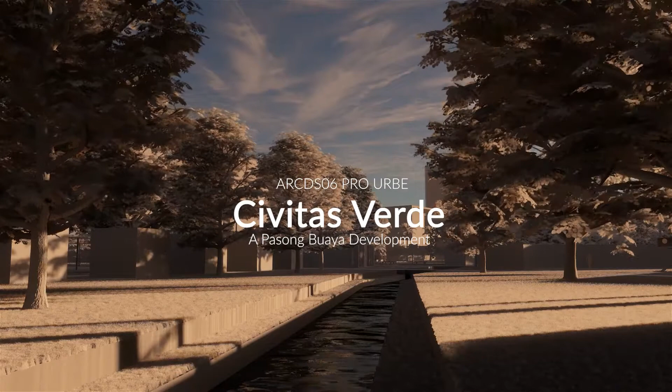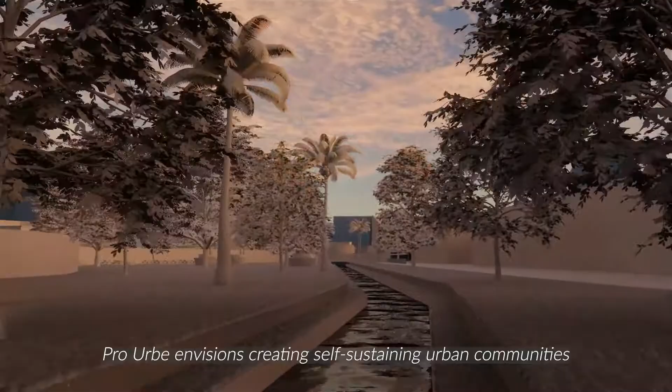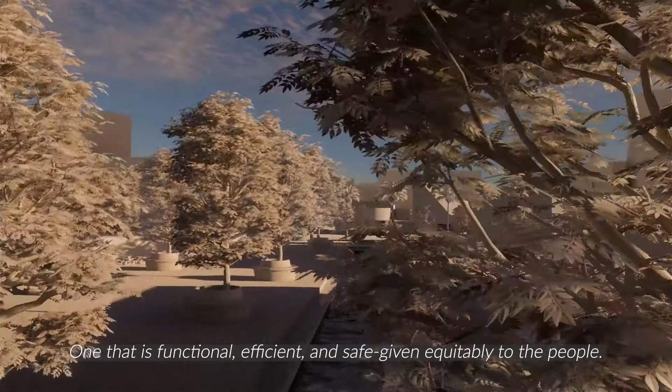Pro Urbe envisions creating self-sustaining urban communities apt for contemporary living in a bustling metropolis, one that is functional, efficient, and safe given equitably to the people. After all, you don't have a city if you don't have people in it, so it all begins with people. Whenever we work on projects, we always make sure that our projects will be suitable for our clients.

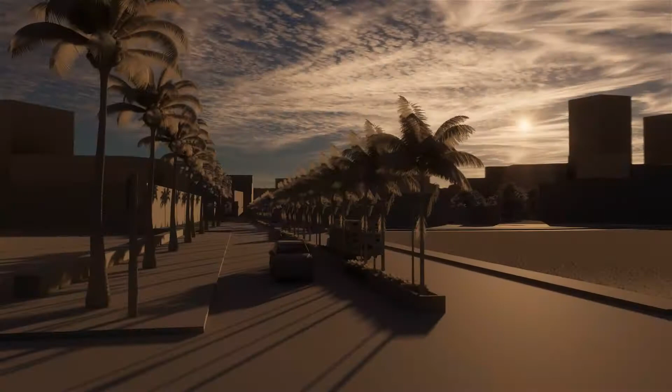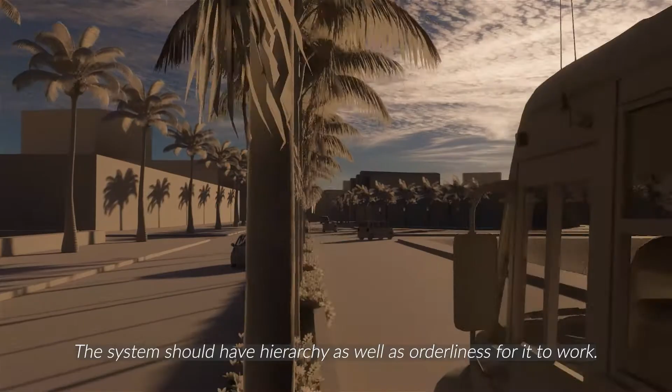A great city, in my opinion, is one with a good transit system, which can be utilized by the whole population, whatever class they may be. The system should have a hierarchy as well as orderliness for it to work. A city with greeneries, which can act like a breathing space, is also something that can lessen the pollution, which is more common in cities nowadays. All in all, sustainability and progression are the keys in making a city great.

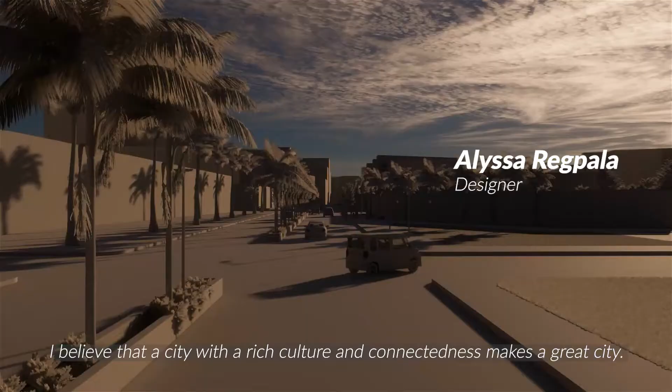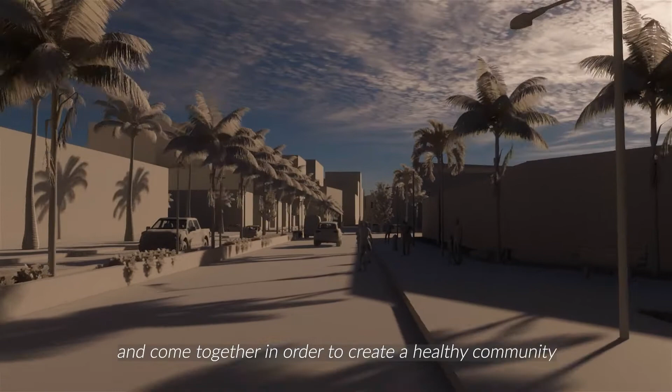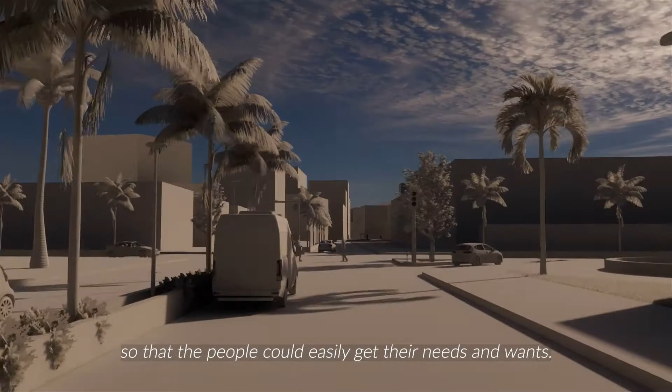I believe that a city with a rich culture and connectedness makes a great city. It is important that the ambience, the people, and the food are authentic in order to bring life to the city. It is also a big bonus if there are places inside the city where members can connect and come together in order to create a healthy community. Also, the availability of the different establishments should be a main priority so that the people could easily get their needs and wants. And lastly, in my opinion, architecture can also make a city great as it attracts more people, opens more discussions, and creates aesthetically pleasing surroundings.

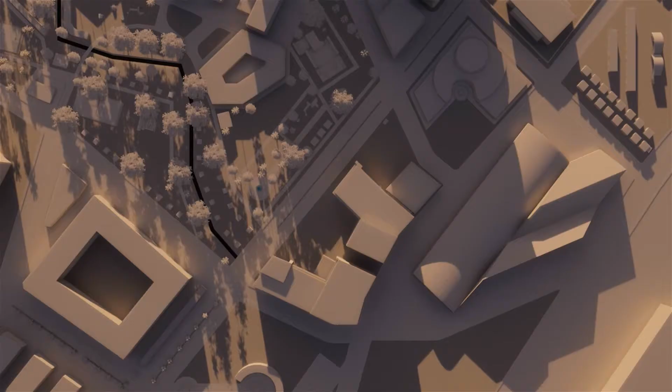When the project was introduced to us, our mentor mentioned a vision wherein we would create a development that is self-sustaining and self-adapting to everyday changes. We'll get to understand different behaviors of humans in different environments. We were tasked to choose a site that we think would best represent the different ideologies we've learned along the way. From the 9 different sites, we chose Pasong Buaya.

The site was unfamiliar to us given that it is located in Cavite. It was also the only site that was outside the Greater Metro Manila, and we thought that it would be a nice challenge for us architecture students to create a community despite it being a total green land. Well, eventually, I was really not familiar with the site. We were given ample time to choose, and quickly browsing through it, I saw that in the vicinity there are establishments and few recreational activities from Vermosa Development by Ayala Land, residential areas, and few neighboring agricultural land fields.

Given that the site has an open green space, from then, on top of my mind, we could either push through in utilizing the area for agricultural amenities if the said land could have a reasonable yields, or to make use of it as a city within a city kind of development.

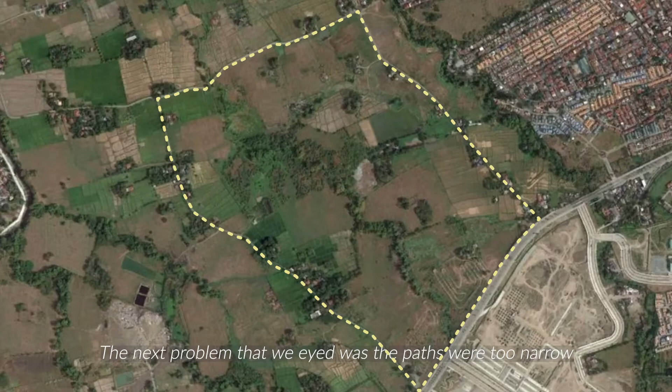The next problem that we eyed was the paths were too narrow and it would be difficult for two cars to pass together. The site was also not accessible as there was limited transportation. The main road near the site, which is the Daang Hari, is also frequented by private cars and is a shortcut from Cavite to Muntinlupa. So during our initial studies, we thought that developing the site may actually cause additional traffic.

We really looked at the site from a lot of angles to really assess the pros and cons and to design an urban plan that would be useful not only to the natives in the area but also to the newcomers.

The next con we observed was that there were fewer trees in the area, which means the sunlight and rain are not commonly covered. The site is also a few miles away from Taal volcano, so volcanic ashfall is a possibility in the area.

The next problem was that there may be a lot of displaced people, but when we conducted our site visit, we learned that most had been paid to evacuate the site by the developer.

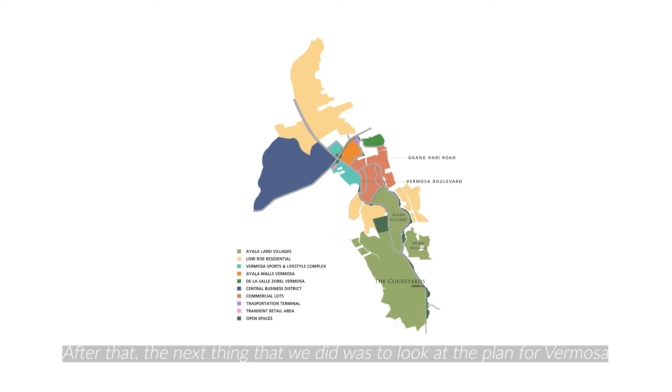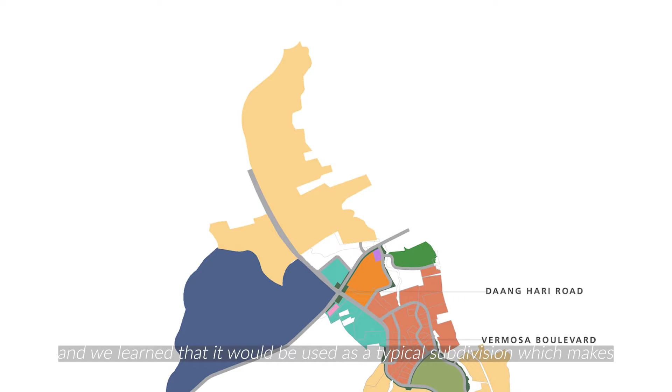After that, the next thing we did was look at the plan for Vermosa, and we learned that it would be developed as a typical subdivision, which makes the promising site a waste. So we designed an alternate plan that would make the site used for a better purpose.

In assessing the site, we discovered different issues such as the lack of cultural and historical importance, as well as the site's lack of accessibility and walkability features.

To further guide us, we created goals that would become the basis of our design. Our number one goal is to boost the present culture and integrate new ones in the community. The residents must become engaged through different initiatives and activities placed through the creation of socio-cultural development strategies.

Creating accessible, comfortable, and safe streets for pedestrians was also one of our key objectives. We would want to increase the number of people using the streets both for walking and for cycling. Public transportation is strategically placed to accommodate a high number of residents and workers.

We also want to reassure the safety and security of the residents by creating better measures for disaster preparedness and awareness, not only through designing roads that pertain to street safety, but also through the zoning of the site.

Which leads to another goal, which is the formation and promotion of passive sustainable design. What we envision is a development that would be useful for generations to generations.

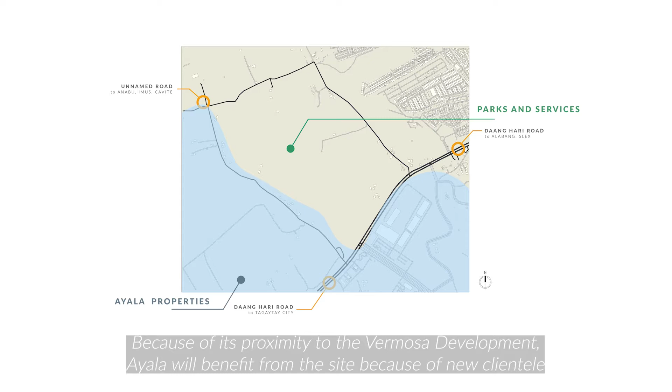In alignment with those goals, we predict a few opportunities for the people involved. Because of its proximity to the Vermosa development, Ayala will benefit from the site because of its new clientele and its traversability from the site to Ayala properties.

The city of Imus will also be able to benefit because, along with the many open spaces and parks in the area, industrial areas like hospitals and transportation terminals will be present in the site, which benefits not only the residents of the development, but nearby neighboring subdivisions as well.

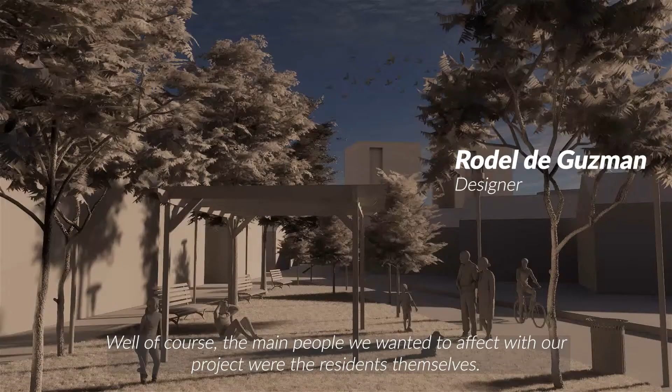But of course, the main people we wanted to affect with our project were the residents themselves. With our goals in mind, we wanted to give them walkable spaces where they could feel connected to people and proud to be a member of their communities, and spaces where they feel safe.

To make our site livable and sustainable, we created different strategies for the different areas we wanted to target. The first one is the socio-cultural development strategies.

We plan to have a space for cultural exchange, presentation, and exhibition. We also plan to create communal spaces within structures and outside, and create a community that resonates with the physical environment and present culture.

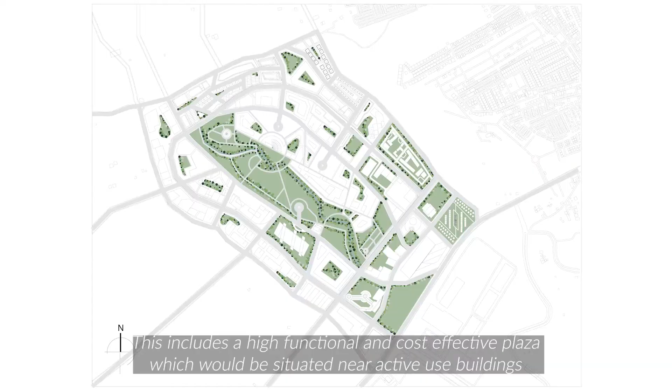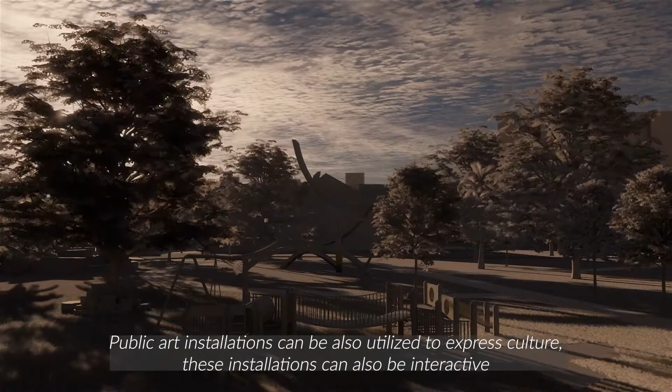This includes a high-functional and cost-effective plaza which would be situated near active-use buildings, as this would help members engage and come together. We also plan to make culture centers which can help the community learn, and public art installations can also be utilized to express culture.

These installations can also be either interactive, passive, formal, informal, planned, or spontaneous to cater to the diverse activities of the area. For the environment development strategies, we opt to have parks and open spaces to enrich the quality of life.

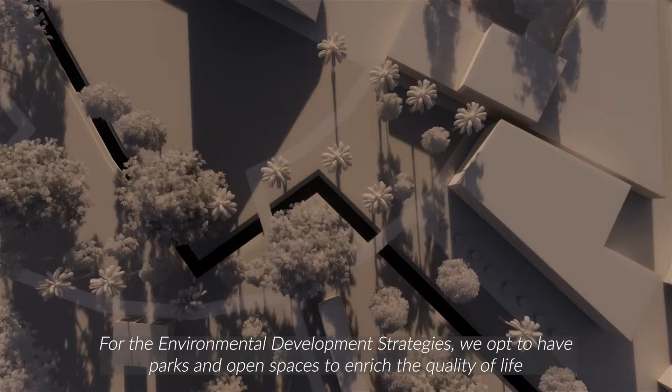For the design, we decided to make it passive and sustainable in order to mitigate the harmful effects of structures to the environment. And lastly, we would apply smart technology to the site.

The next one is the economic development strategies. In making this project livable and sustainable, this includes increasing the employment rate for residents and non-residents by producing more jobs and more opportunities.

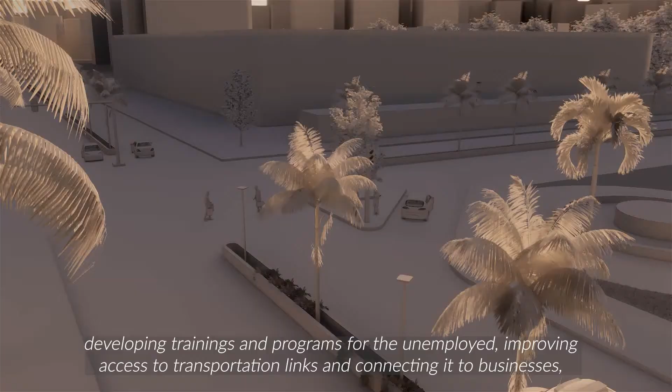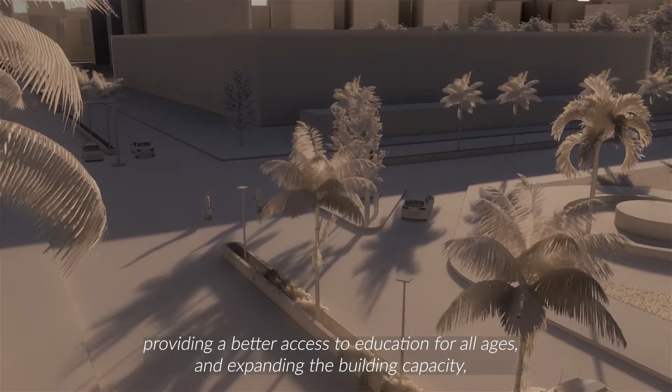Developing trainings and programs for the unemployed, improving access to transportation links and connecting it to businesses, providing better access to education for all ages, and expanding the building capacity.

These are the strategies we thought of. Clearly, building a city within a city.

On top of it all, in economic development strategies, we opt to have a successful city planning for a better return of investment, which can be attained by attracting outside investors, getting involved with the community, and having long-term measurable goals.

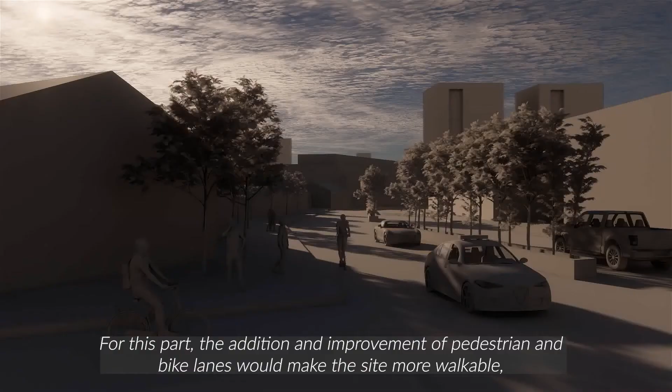Last but definitely not least is our spatial, zoning, and mobility strategies. For this part, the addition and improvement of pedestrian and bike lanes would make the site more walkable, sustainable, and livable, as it would aid convenience and recreation.

Furthermore, it would benefit the environment in lessening air pollution.

We opt to carefully design the public spaces, catering to users with inclusivity in urban street design amenities, creating more compact activities within the central nodes to have familiarity and community-activated spaces.

Likewise, the creation of mixed zone areas is also something that the site has. This type of zoning attracts people by having their necessities available within a walking distance parameter.

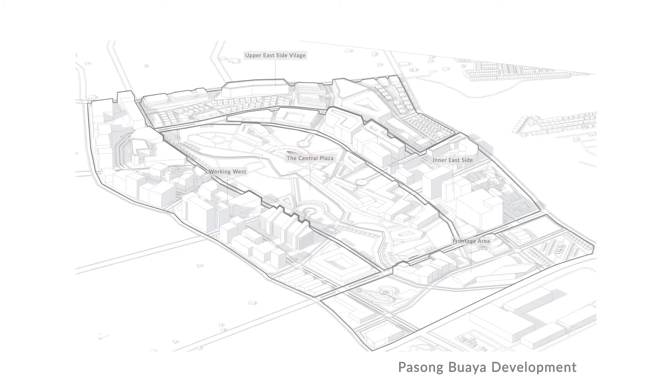To further enhance our strategies, we created different parts of the city that would interact with one another while having their own different purposes. We created 5 main areas in the vicinity, namely the frontage area, the Working West, the Upper East Side Village, the Inner East Side, and the Central Plaza.

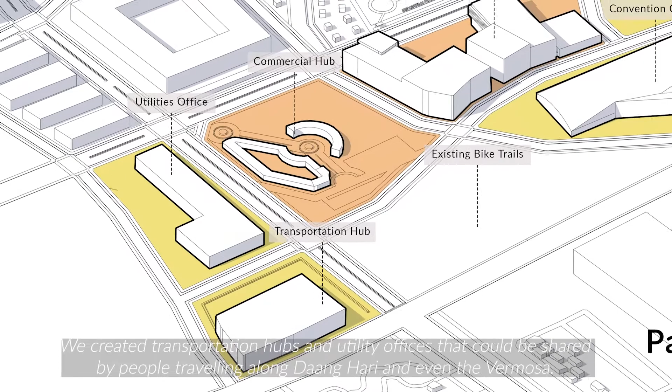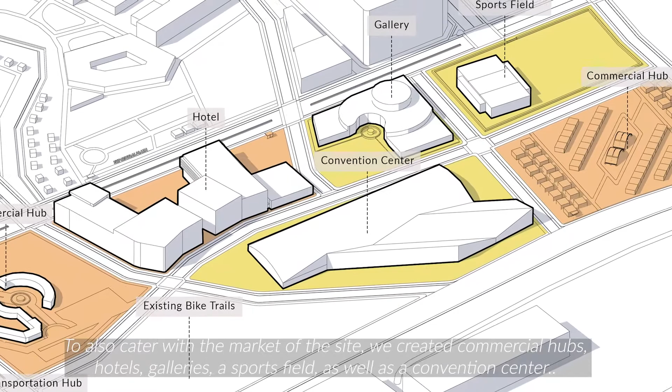The frontage area contains different institutional and commercial areas. This area mainly focuses on welcoming the residents as well as other people to the development. We created transportation hubs and utility offices that could be shared by people traveling along Daang Hari and even the Vermosa. To also cater to the market of the site, we created commercial hubs, hotels, galleries, a sports field, as well as a convention center.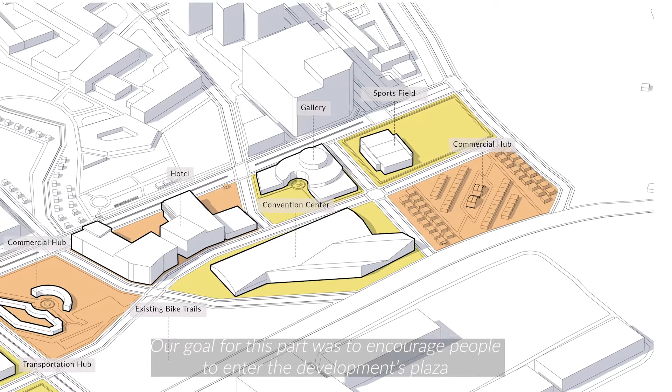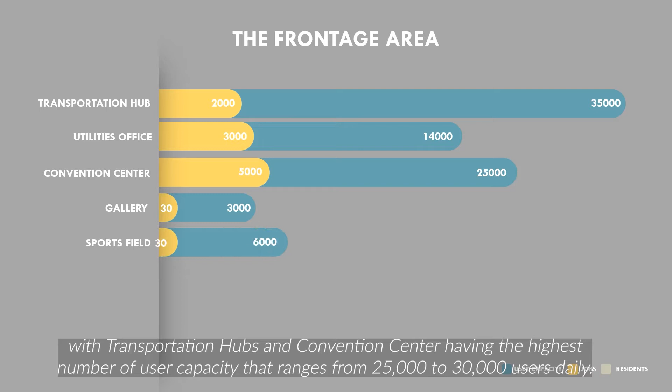Our goal for this part was to encourage people to enter the development's plaza while considering the relationship to the neighboring areas. It gives a rough estimate of 16,000 jobs and a user capacity of 98,000 people, with transportation hubs and convention center having the highest number of user capacity, ranging from 25,000 to 30,000 users daily.

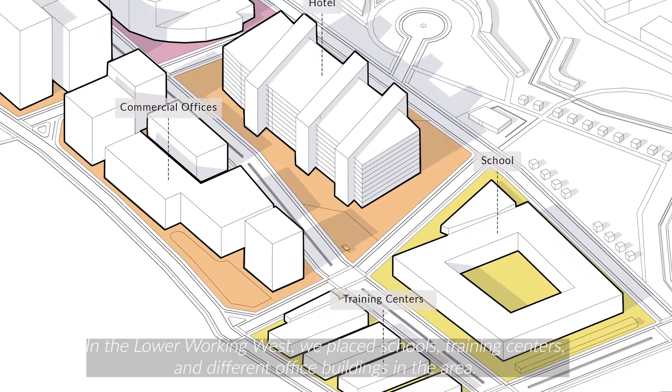To solve the project's vision about sustainable livelihood and employment, we created the Working West. The Working West is divided into 2 areas, the Upper Working West and the Lower Working West. In the Lower Working West, we place schools, training centers, and different office buildings, while the Upper Working West focuses on the mixed usage of buildings for both commercial offices and residential.

Pertaining to the name itself, Working West provides opportunities for employment as it creates a rough estimate of 45,000 jobs for the Lower Working West and 75,000 jobs for the Upper Working West.

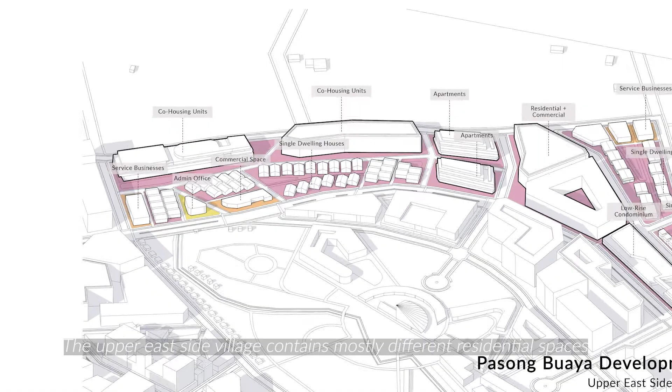The Upper East Side Village contains mostly different residential spaces such as single-dwelling houses, co-housing units, apartments, and condominiums. We also place different commercial spaces specifically catering to services such as water stations, laundry shops, public markets, and grocery centers. The Upper East Side Village houses almost 25,000 up to 40,000 residents.

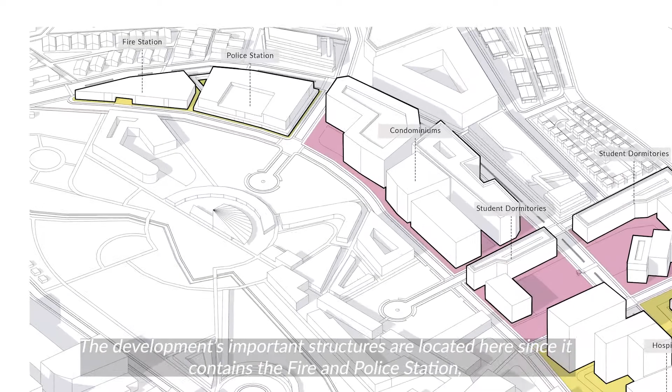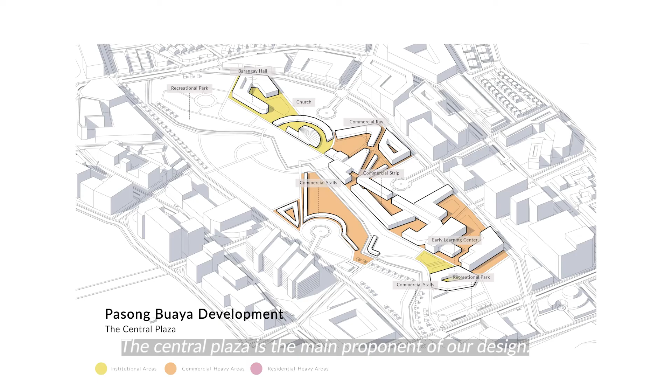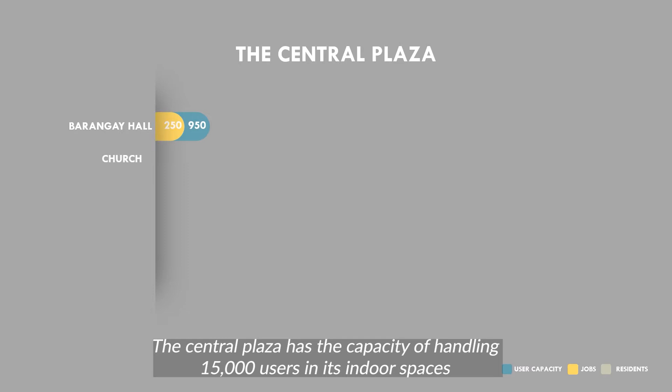The Central Plaza is the main proponent of our design. Our goal was for people to use the space to better understand one another and promote cultural and historical awareness. There is a small creek running through the site and we want to utilize it well by creating community spaces around it. The Central Plaza has the capacity of handling 15,000 users in its indoor spaces and could range from 80,000 to 100,000 people for its open spaces.

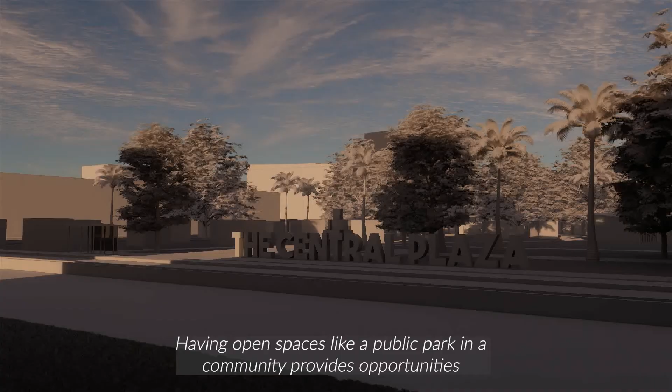Having open spaces like a public park in a community provides opportunities to enrich the quality of life for people of all ages and abilities. It provides a wide array of social, health, economic, and environmental benefits to individuals and to the community as a whole. Besides, the site itself is full of greens and we want to avoid cutting trees.

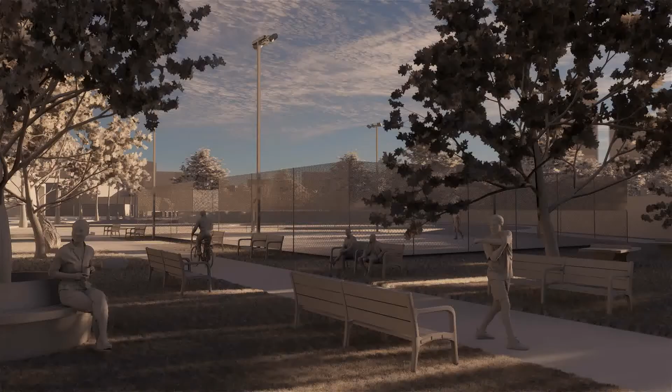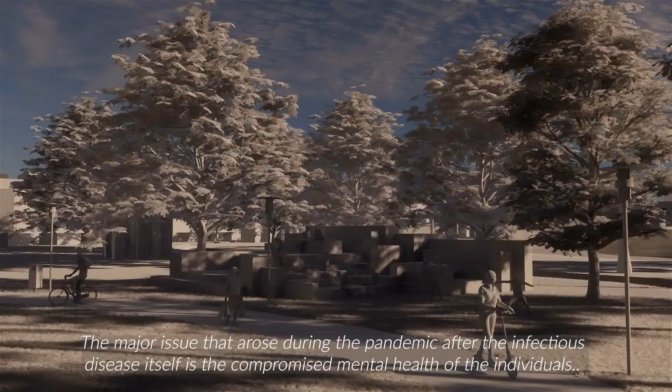The pandemic made us realize the importance of having an open space. Open spaces allow movement, especially within dense urban areas. The lockdown caused discomfort and degraded people's quality of life because their overall health is affected. The major issue that arose during the pandemic after the infectious disease itself is the compromised mental health of individuals.

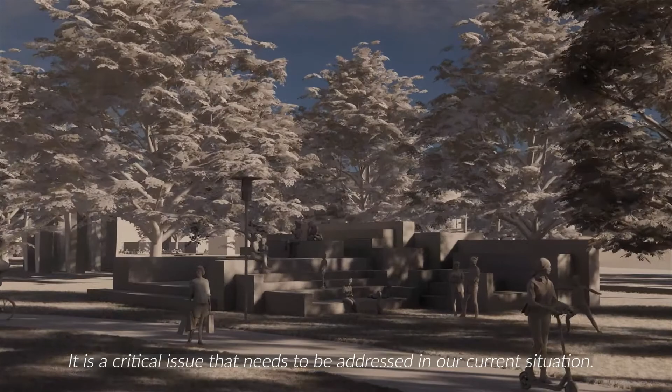It is a critical issue that needs to be addressed in our current situation, because being stuck in our homes or being isolated, not being able to get fresh air and light as often as possible, and limited physical movement significantly add to people's stress.

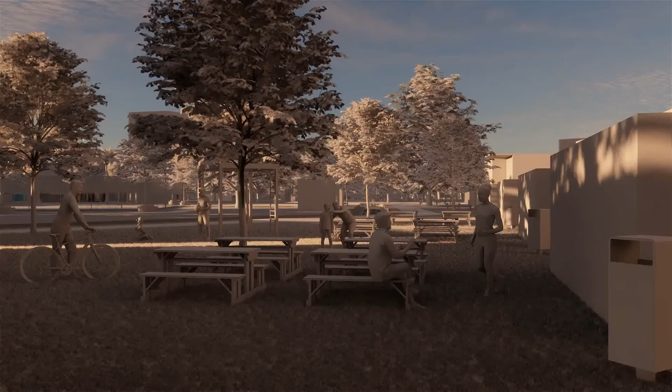We have also placed commercial spaces inside the plaza and allocated space for food or market stalls for economic and social purposes. In this way, the Central Plaza will not be dead in a sense that it will be infiltrated by criminals in the future. After all, it is placed in the middle of a bustling city.

To make the Pasong Buaya development walkable, we applied Jeff Speck's principles, doing 4 things simultaneously: it being useful, safe, comfortable, and interesting.

In the development, we have a total of 4 road typologies. First is road type A, the primary road, which directly connects the Daang Hari road to the major establishments in the development. It has the largest width to smoothly accommodate users from the main road to the secondary road. Alongside the roadway are bike lanes and pedestrian walkways.

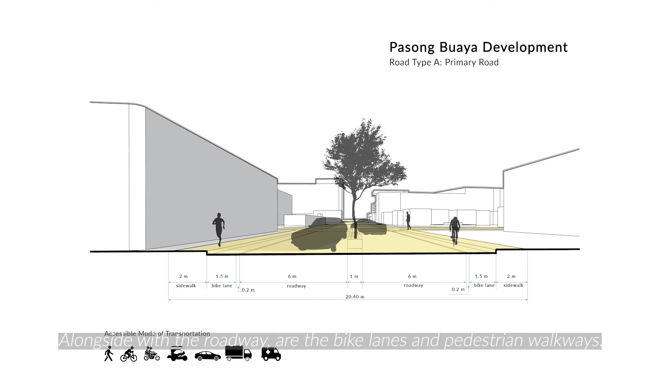Followed by road type B, the secondary road, which is the narrower version of the previous one, linking the primary road to the inner parts of the area.

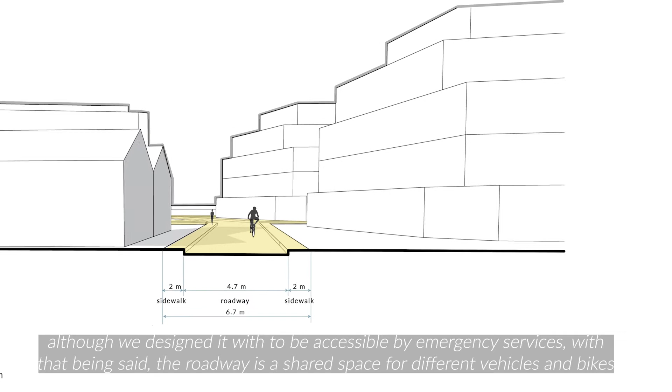Road type C, or the tertiary one, were placed around the residential areas. The road width is much more precise to somehow create interaction between the residents, although we designed it to be accessible by emergency services. With that being said, the roadway is a shared space for different vehicles and bikes.

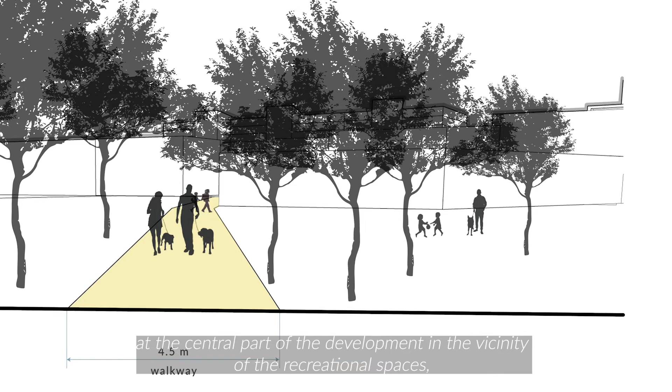And lastly, we have road type D, or the tertiary 2. This typology is only located at the central part of the development, in the vicinity of the recreational spaces. This is exclusive for pedestrians. However, in circumstances, we also considered this road to be accessible by emergency services.

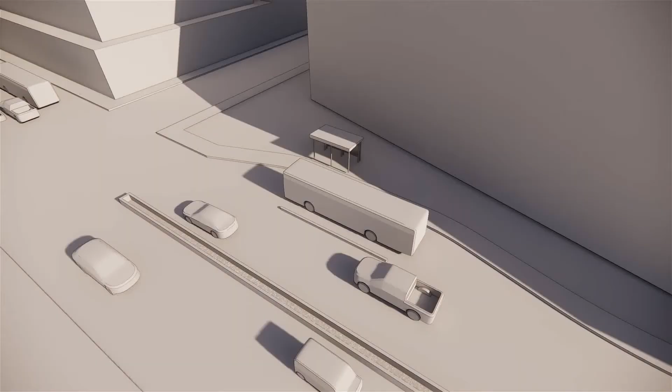Going into the transport sheds along those roads, they were designed with minimal impact in mind. The intention was that this is another separate street furniture rather than a separate space. With that being said, its small footprint allows it to be flexible in being put beside drop-off and pick-up areas, allowing pedestrians to walk through without interruption.

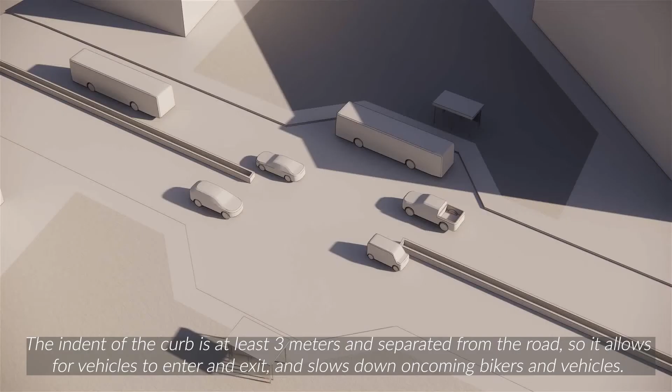The indent of the curb is at least 3 meters and is separated from the road, so it allows for vehicles to enter and exit and slows down oncoming bikers and vehicles.

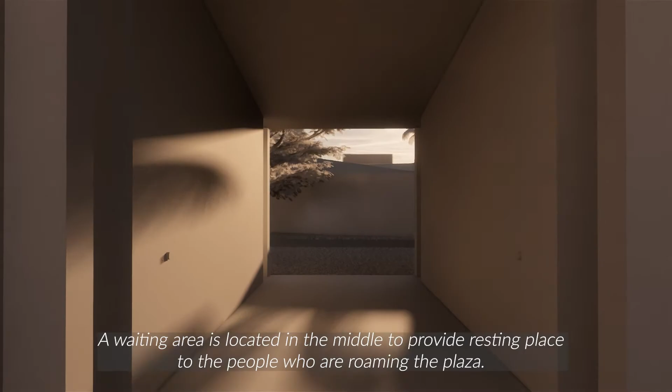We then designed a public restroom that would be situated in various spots in the central plaza. It is open on both sides so people can enter wherever they are. A waiting area is located in the middle to provide a resting place for people roaming the plaza.

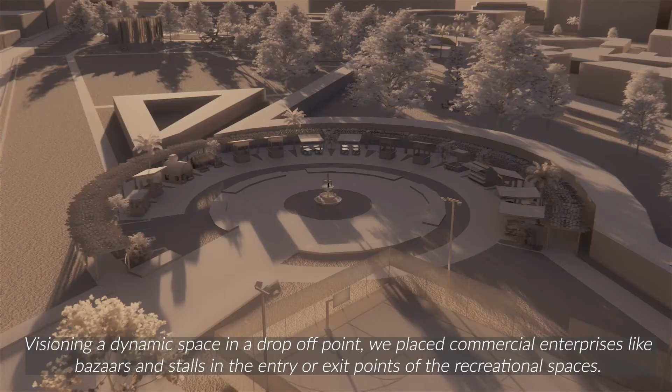Visioning a dynamic space in a drop-off point, we placed commercial enterprises like bazaars and stalls in the entry or exit points of the recreational spaces, to either welcome you or to send you off with a lively environment.

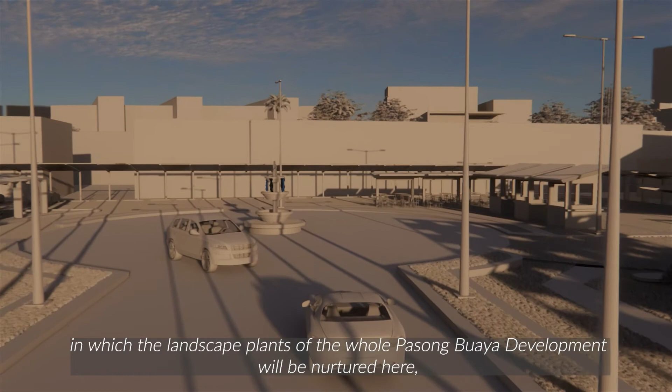Conceptualizing a multi-use parking space, we thought of incorporating an ornamental nursery garden in which the landscape plants of the whole Pasong Buaya development will be nurtured. In time, it could also be alternated by yielding plants for a farm-to-table concept.

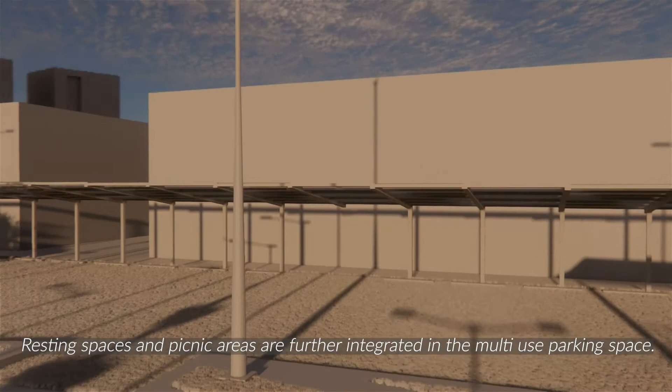Resting spaces and picnic areas are further integrated in the multi-use parking space. Beneath it is a reservoir for the rainwater harvesting system. The water runoff would be used more efficiently, recycling this harvested rainwater for utilities and maintenance of the whole project.

As we can see today, our environment is suffering from the different machineries, factories, and activities we have done, and this has affected its inhabitants as well. It is really important to create a livable and sustainable city, because as designers, we know how to mitigate these harmful effects and design with nature rather than against it.

In designing structures, we should focus not only on the structure but also on how it would affect internal and external factors.

Recently, there has been a shift of importance when it comes to nation development, that is, we look at our cities rather than our country as a whole. Because of this, it's important that we develop cities that will be able to stand the test of time and remain good spaces for everyone to thrive in. That's why making strategies that make everyday life just a little bit better are the most important in the long run.

Our environment can affect our behavior. It molds the way people act, feel, and think. Personally, I suppose that architecture and urban design is a field, or a study and practice of medicine, as it heals something that might not be cured by any drug prescription.